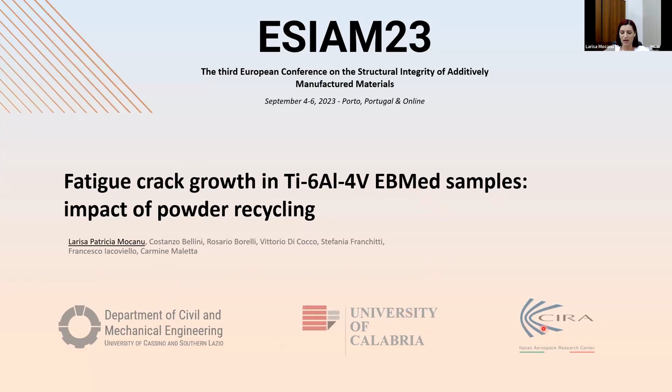In this presentation, I'm gonna introduce briefly the topic, then I'm gonna show you the goals of this research activity, and then I also wanted to illustrate some of our results from our previous works. Then I'm gonna start with the materials and methods, and the results of this particular topic, which is the fatigue crack propagation in the titanium samples.

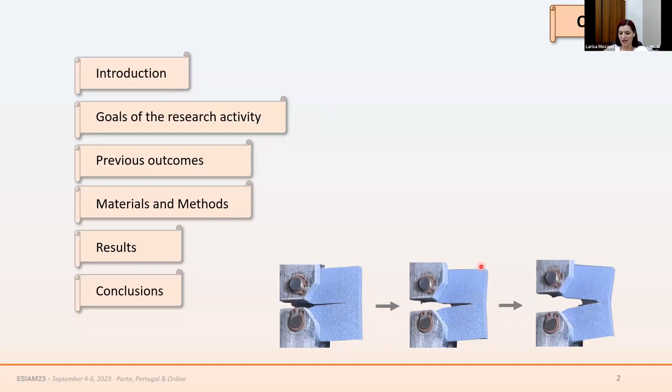So, as is known, the electron beam melting process starts with a metal powder as the material feedstock. If it's a virgin powder, then it's previously atomized according to one of the several existing methods. After the manufacturing process, we will obtain the desired components and a certain amount of waste powder. In order to keep low the production cost and to improve the process efficiency, it is possible to reuse this waste powder in the next manufacturing cycle.

This waste powder can be firstly sieved in order to narrow the particle dimensions, and also to eliminate any elongated particles, bonded particles, and so on. Then it is also possible, but not mandatory, to mix this sieved waste powder with other virgin powder, for example, to keep low the oxygen content. Starting with this mixed powder, another manufacturing cycle will start, at the end of which we will obtain other components and, of course, other waste powder.

So here I want to highlight that these components may be different because the initial material feedstock is different. And also this virgin powder may be different from the waste powders because inside the EBM chamber there may be some degradations.

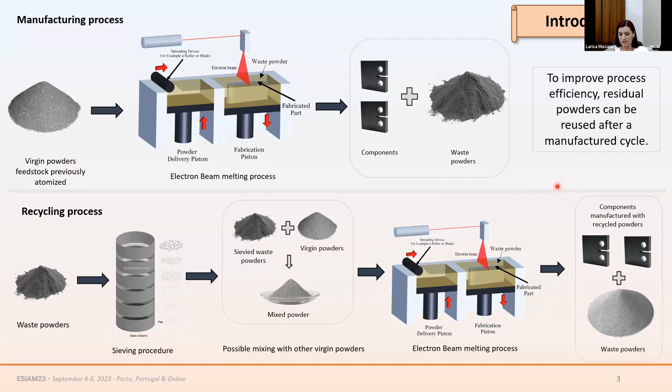So in this work, we analyzed 3 sets of components produced with electron beam melting, starting with 3 batches of titanium powder particles. The first one is batch A, which is a powder recycled more than 100 times. Then we have batch B, which is a powder recycled 5 times, and in this case, at each cycle, this ELI powder was added in order to keep low the oxygen content.

Then we have batch C, which is the virgin powder produced by this company according to their advanced plasma atomization process. For each batch, several different components were produced, and in this work we focused on these plates. I wanted to highlight that the building direction is along the z-axis. Each plate was then sectioned in order to obtain 4 compact tension samples, with the crack length perpendicular to the building direction.

All of these samples were subjected to the crack growth propagation test using this Instron 10,000 fatigue machine. Here below, I also wanted to highlight that the powder recycled more than 100 times, batch A, exceeded the oxygen limit according to this ASTM for the aerospace field. So this is detrimental for these powders.

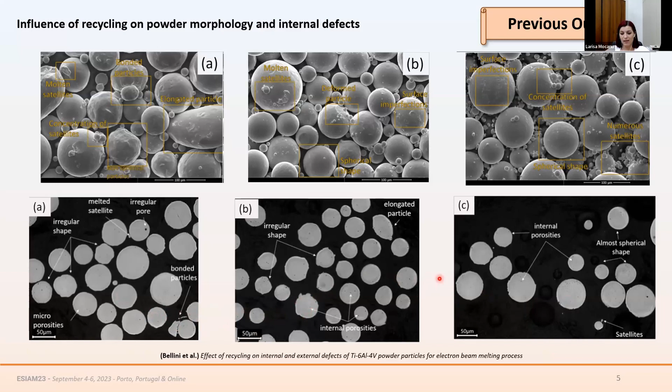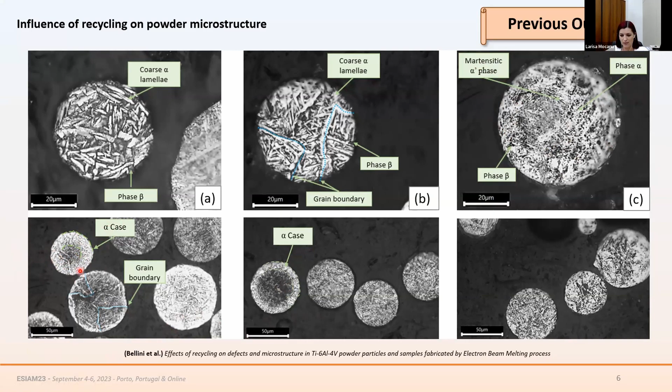Another interesting thing is this alpha case, which was observed only in the two recycled powders. And this alpha case is a layer rich in oxygen around the particles, which is also brittle and harder than the core. But this needs to be properly investigated.

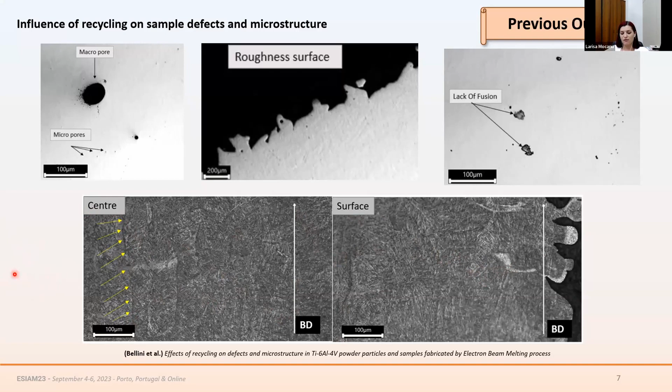Regarding the microstructure, no particular differences were observed between the three kinds of components. They exhibit mostly a basket weave microstructure. And something interesting was these prior beta grains, which tend to follow the building direction, but this was observed only in the center of the component, and close to the surface, this was not observed. This also was observed in all of the three components. So also here the influence of the recycling is not visible.

We also analyzed the fracture surfaces, and we saw that all of the components were characterized by a high amount of lack of fusion defects, and the crack starts from one of these lack of fusion defects, which is a process parameters related defect, and it is not due to the recycling strategies.

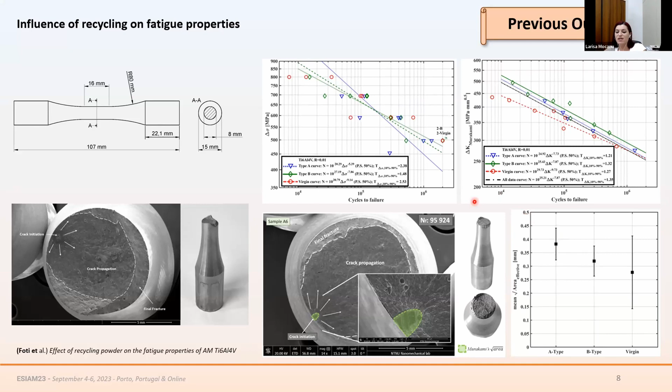We also performed here a defect influence analysis according to the Murakami method, and we analyzed the external defects and also the internal defects, and we saw a slight difference in the average dimension of the critical defects, and it is higher with increasing the number of recycling, as can be seen here, the comparison between the A type with the virgin type. But in this case, we saw also a decrease in the data scatter, as can be seen here. But also in this case, these are preliminary results, so we need to investigate this topic better.

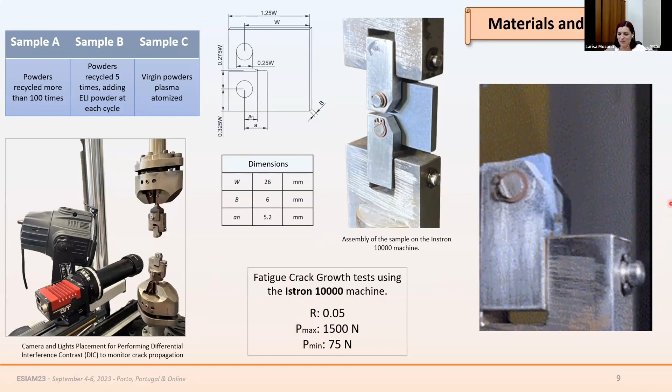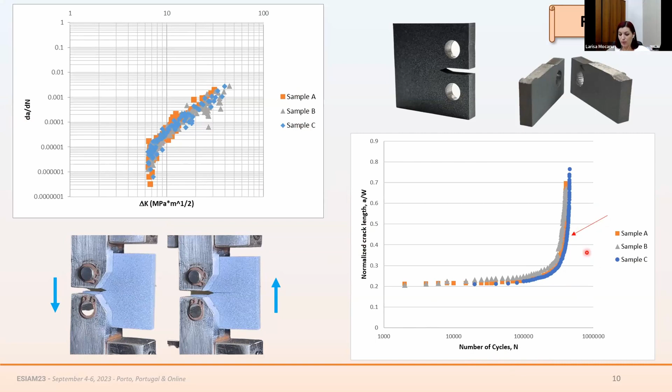And here are the results. So we saw from this crack propagation rate versus stress intensity that there was no particular difference between all of these 3 components analyzed, and the results are similar to each other. While regarding the normalized crack length versus the number of cycles, we saw a small difference for sample C, which seems to have a greater resistance to crack growth propagation, but also in this case, this difference is minimal.

And we also investigated the fracture surfaces of these components after the final fracture, and we saw no relevant differences between the 3 types of components. I just wanted to highlight here the classical fatigue striation. Also, in this case, these components are characterized by a high amount of internal defects, such as these voids. And we also saw some secondary cracks, but this was observed in all the components analyzed.

So also in this case, particular influence of the recycling strategy was not observed. And I also wanted to highlight that there was a transition from this fracture mode, which is more ductile in this area, closer to the first steps of the crack propagation stage, while approaching the area closer to the final fracture, there is a transition from this ductile mode to a mixed mode, brittle and ductile.

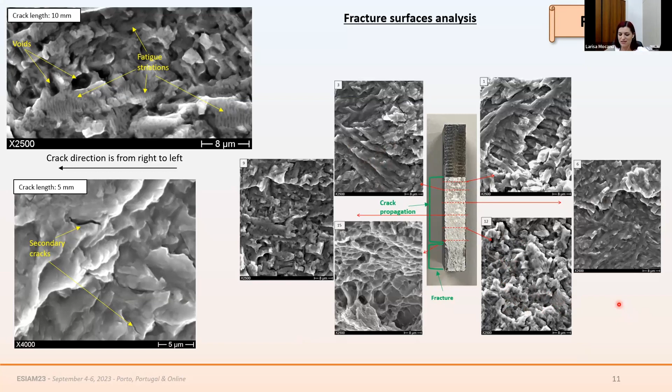But also in this case, this was observed for all the 3 kinds of components. So also in this case, relevant influence of the recycling processes was not observed. So in conclusion, in this work, we analyzed the effect of powder recycling on the fatigue crack propagation behavior of these titanium components produced with electron beam melting. These components were produced starting with 3 batches of powder: the powder recycled more than 100 times, which is type A, the powder recycled 5 times, which is type B, and the virgin powder, which is type C.

And we saw that there were no particular differences between the 3 samples investigated, because all 3 samples showed similar behavior. A slight difference was observed in the type C component, which is the virgin one, although this difference was minimal. Regarding the fracture surfaces, we observed a high level of porosity. This porosity and the defects are mainly due to the process parameters of the electron beam melting machine, so they are not related to the recycling processes.

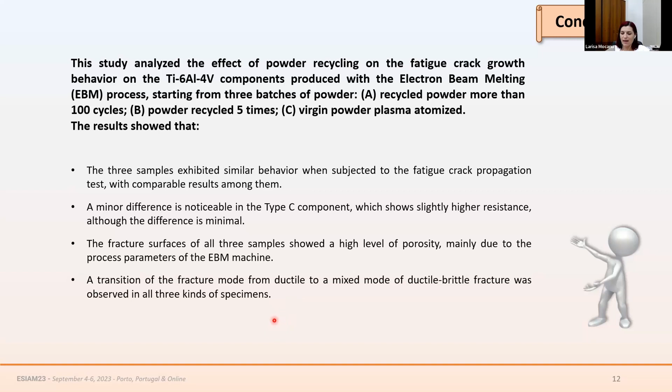And also, we observed the transition of the fracture mode from ductile to a mixed ductile-brittle mode in all three kinds of specimen. And also in this case, as I said, there was no relevant difference regarding the recycling processes. So thank you for your attention.

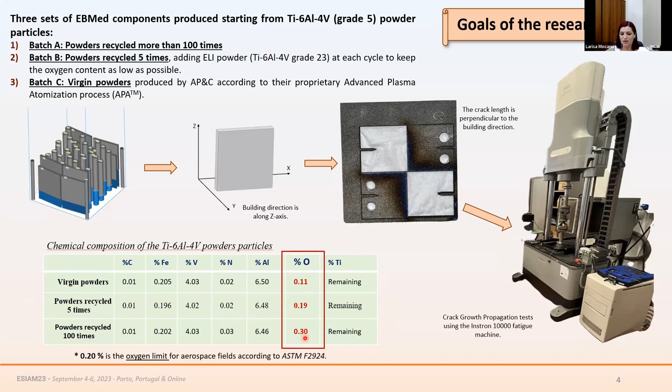Yes, if I understood, did you ask if the batch B, which is the powder recycled 5 times, has some new powder? Yes, yes. At each cycle, we added this ELI powder, which is basically the same titanium alloy, but it's grade 23, because we wanted to keep the oxygen content low, because this alloy is characterized by a lower oxygen content. Because we know from the literature that we have this problem: as the recycling cycles increase, we have an increase in the oxygen content. Okay, thank you.